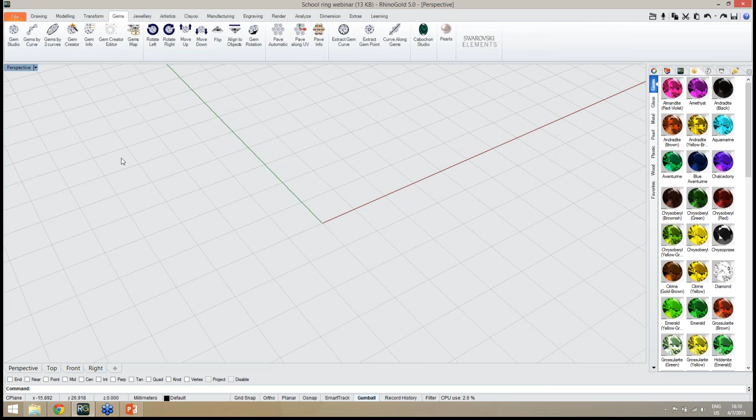So the first step, as always, I recommend to start with either a ring size or a central gem. In this case, I'm going to start with the central gem. So let's go to Gems tab, and then with the Gem Studio tool, we can define the main gem. In this case, we will use Cushion Gem Cut. As you can see under Gem Studio, we can easily select the gem cut we want to use.

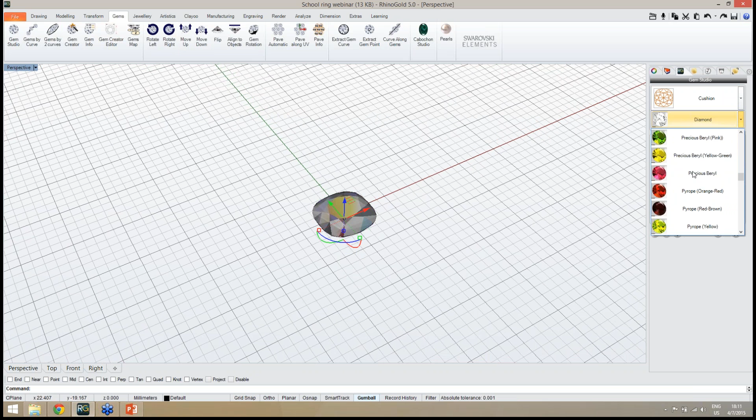And then, of course, we must select the gem, so Cushion. And then we just need to define the size. Let's do it with 6 millimeters. And then the material, of course, in this case, well, I can change for any other material. Let's use Ruby and click OK to add the gem to the document.

So the first step, the gem, is done. Now the next step, I'm going to define the ring size and the ring parameters. So I'm going to use under the Jewellery tab the Signet ring tool. The idea is to define with the Signet ring the shape we want to create, and the ring size, in this case let's use size number 18, and then adjust all the parameters.

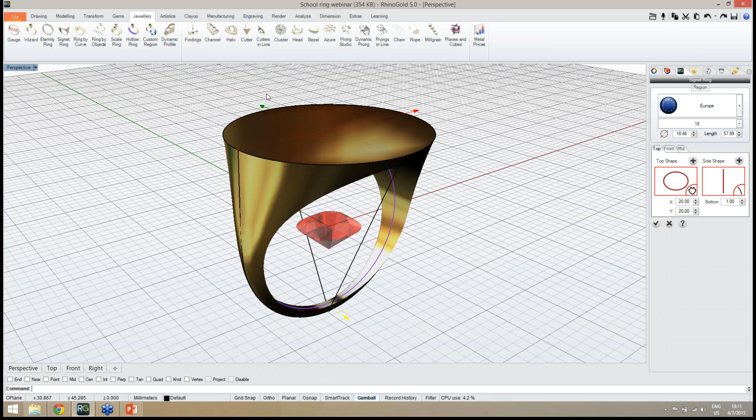So instead of using a round shape in the top, I want to use a shape like the Cushion Gem Cut. What I'm going to do is get under the Gems tab to use the Extract Gem Curve. This tool will allow me to extract the profile curve from this gem. Now I want to use this curve as my top shape for the Signet ring. So I just click Add, and I will define the name. I can define Cushion Curve.

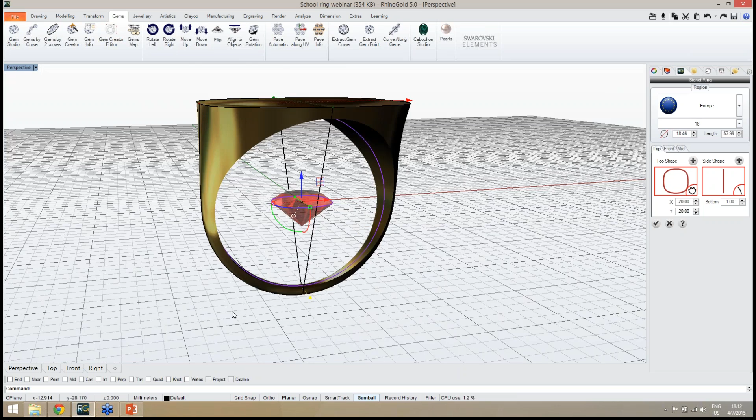And as you can see, automatically it will adapt the ring size, so in this case the ring top shape, to the curve we defined.

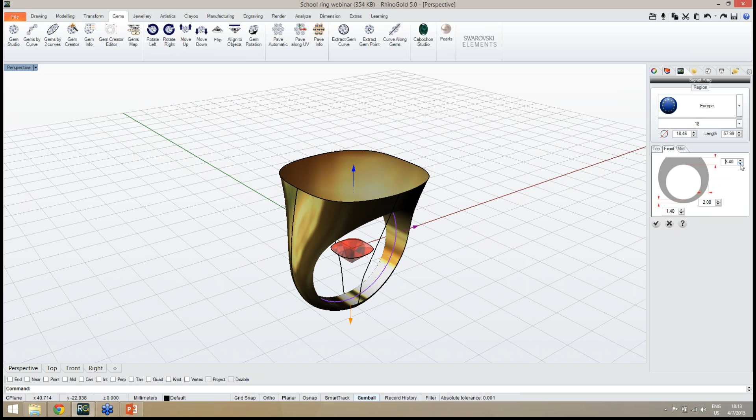So the next step now is to define all the parameters. I'm going to define the bottom with 8 millimeters. I'm going to define the front total with 4 millimeters, using the parameters in the side panel. I can also define the side with 2 millimeters. And of course the bottom, let's use 1.4, looks good. In the top maybe a little bit less, 3 millimeters, I believe it's enough, 3.2.

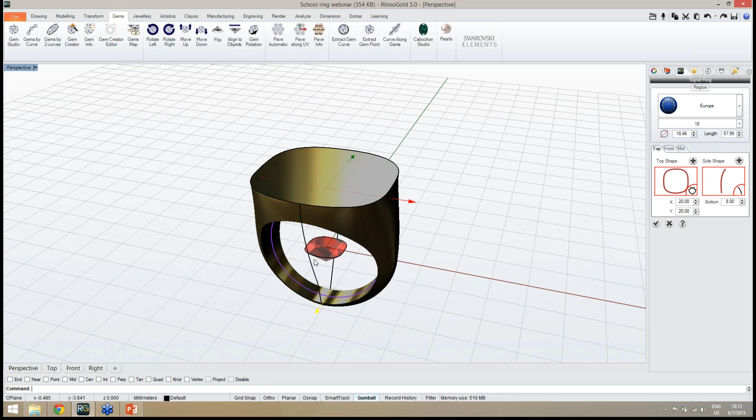And of course in the top view we have the option to define the side shape. So instead of the straight line, I'm going to use profile number 5, and as you can see it will adjust the size, the ring shape with this side curve. So this is the idea. We have the ring defined. I just need to click OK to add the ring to the document.

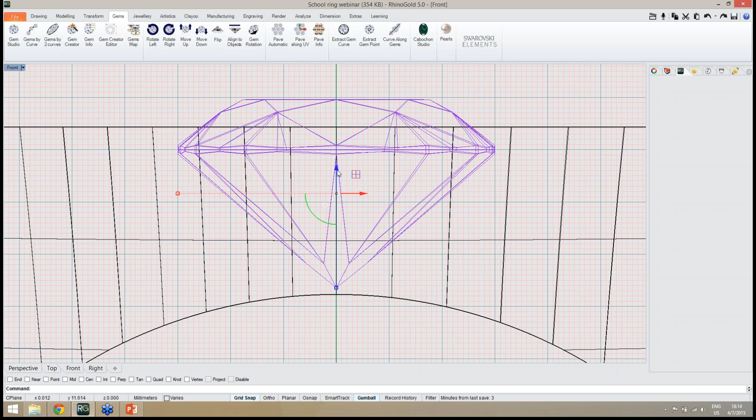This will be the base I'm going to use to define my ring, and now the next step, I'm going to move the gem to the top of the ring. So I select the gem and the curve, and in the front view, using the gumball, in this case I'm going to use the grid snap option. I just use the gumball to move the gem exactly where I need, so I will define exactly in here. And now back to the perspective.

What I'm going to do is first remove the top surface. So this flat surface in the top, I will change it for a different shape. Under the modelling tab, under the cap submenu, we have the extract surface tool. We select this tool, extract surface. We need to select the surface to extract and make sure you are using copy no, so I don't want to copy, I really want to extract this one. I select the surface, press enter, and now I can delete directly with the keyboard to delete my surface.

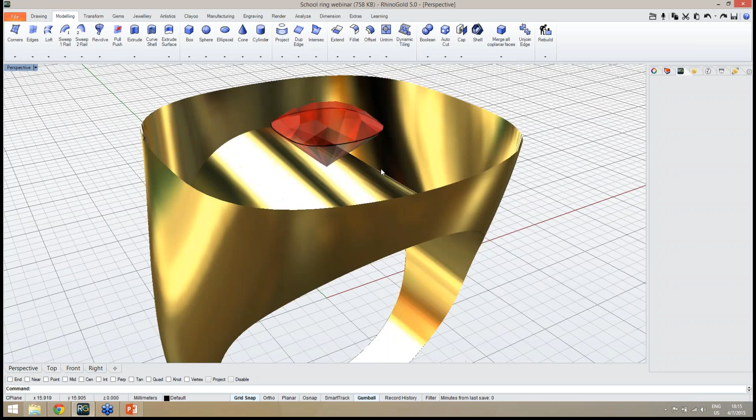As you can see, now my ring surface is open. What I need now is to create another surface. But before, in the top view, I'm going to select this curve, and I'm going to create a curve between these two. The idea is using the transform tool, under the transform tab, I'm going to use scale 2D, so scale two directions, and make sure in the command line we are using the copy option yes.

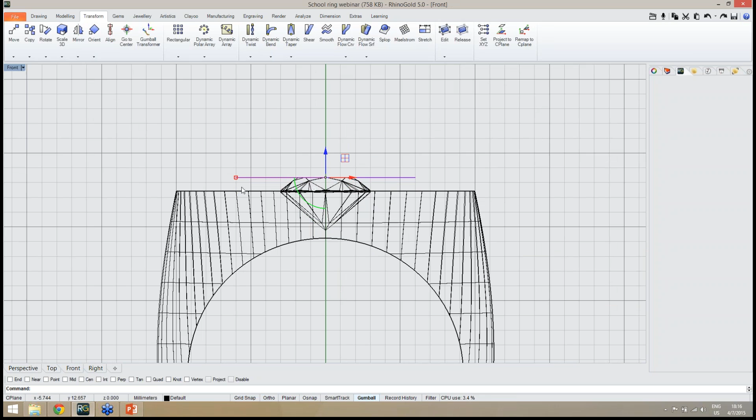So I start from the center and create a curve in, probably without grid snap, just in the middle, so it will be here. Looks good. Enter. So now in the perspective we have another curve, and I'm going to move this curve. Let's go to the front view. I'm going to move this curve to the same height as the top gem surface. So now the idea I can see in the perspective, if I need to scale a little bit, I can scale easily with the gumball, just a small detail.

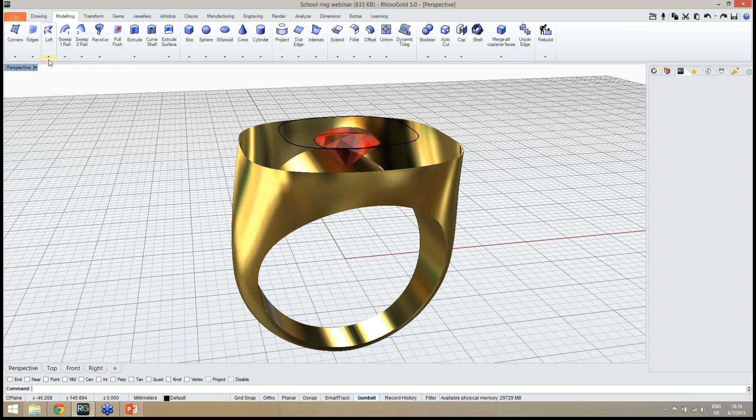And now I want to create a surface using this curve. The idea is under the modeling tab with the loft surface tool, I select the curves to loft. The first one is the edge, the second one is this curve, and the third one is the curve around the gem. So I select these three curves, press enter, and as you can see I have here the direction of the curves and the starting point. So I press enter again, and I have this surface.

Remember, by default it can be normal, so it will be a round surface, but we can easily define straight sections and preview. So this is the shape I'm looking for. After this I click OK to add this surface, and the next step, I'm going to hide the gem to show what I'm going to do.

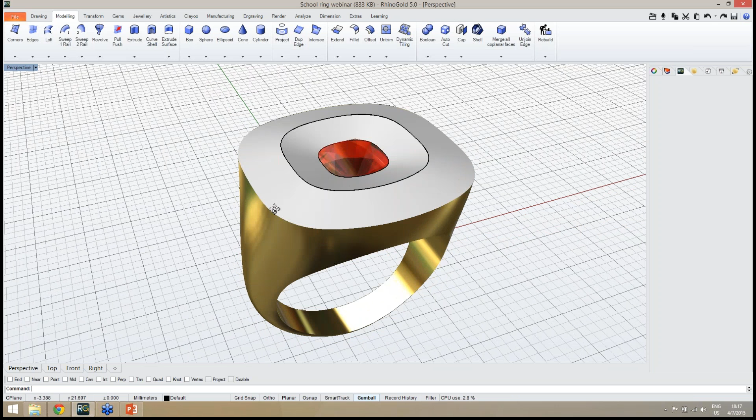Select the gem, hide - remember here press shift to show this viewport toolbar. And now I want to use this curve to create a planar surface. So under the edge submenu we have planar surface, and with the curve selected I create my surface.

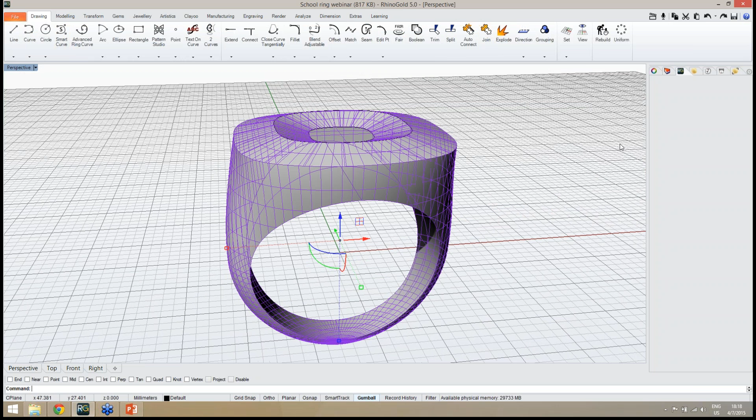So what I need now is to join all this surface in a single closed solid. I select this one, this one, this one, and under the drawing tab with the join tool, join all these in a closed polysurface. As you can see in the side panel, we have this as a closed solid.

So the next step, I will start defining in the right view the model, in this case the curves I want to use in this side part of the ring. So let's use the Smart Curve tool under the Drawing tab, and I'm going to use the option Symmetry Vertical. I activate this option in the command line, and also I will say Closed Curve.

So now I can define easily the curve I want to use. So this will be the idea, the shape of the curve - let me select the curve. As you can see, it's here. I can scale a little bit or adjust if I want, maybe in this direction, and it looks good already.

So I have this curve, and now I want also to put some letters inside this curve. The workflow will be: I'm defining this curve in the C-plane, and then I will project it to the surface. So the idea is, in the right view, to define everything I will need.

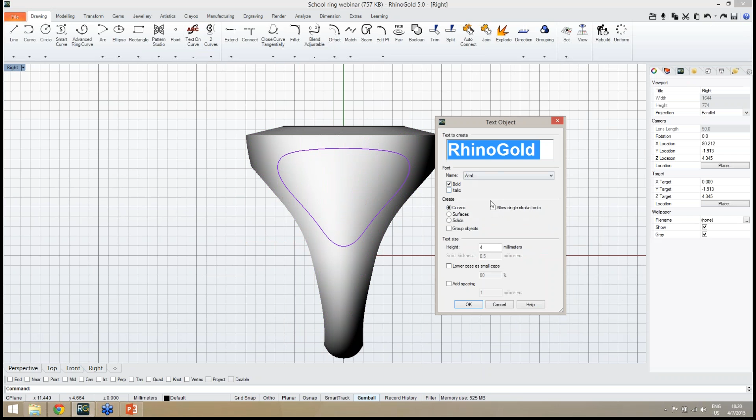So now I will use text, and I will define first a test - RhinoGold - and let me just adjust, let me undo the size. So what I'm going to do is repeat this step: RhinoGold, and the size I will use, let's try 1.8.

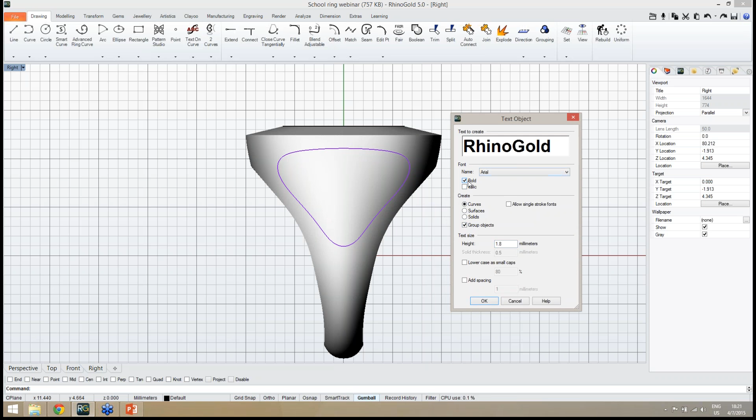Also make sure in these text options we can generate curves, we can generate surfaces, solids. So I'm going to group them, and I will use Arial Bold and 1.8 millimeters. So when I click OK, I can define my text curves here.

Okay, and now the next one, I'm going to define another text - 'university'. Of course, you can customize this exactly as you need. This is just a sample of the workflow we recommend. You can use your own letters - this is just to make sure it's possible to do anything.

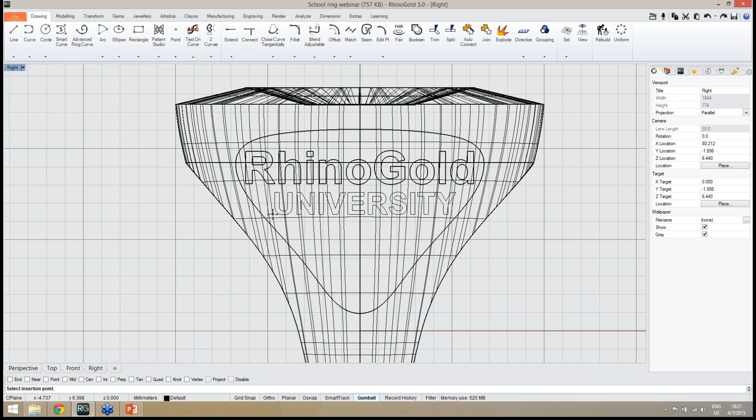So I'm going to place the letters under RhinoGold. Remember, any question, use the chat. And finally, the last one, the text, I will define '3D'. Maybe 3 millimeters - let's try, looks good. So I will place this in this part.

Okay, perfect. So I have the side curves I want to use. These are the curves, and now I just need to project these curves to this surface.

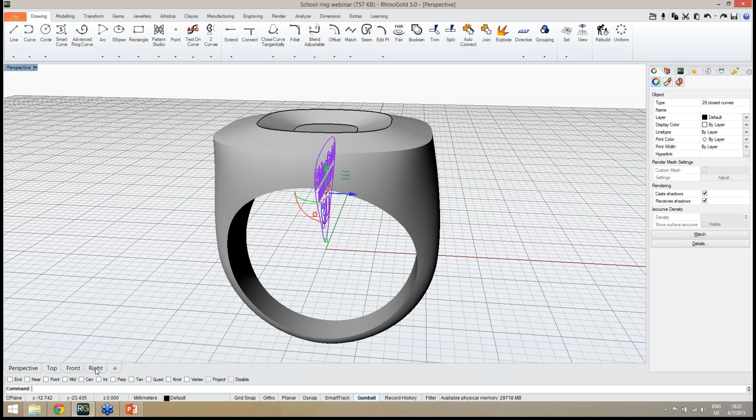So what I'm going to do is make sure I'm in the right view, and now under the modeling tab we have the project tool. We just click, select the curves, and then the surface to project - in this case this outside surface. I press enter, and now let's take a look at the results.

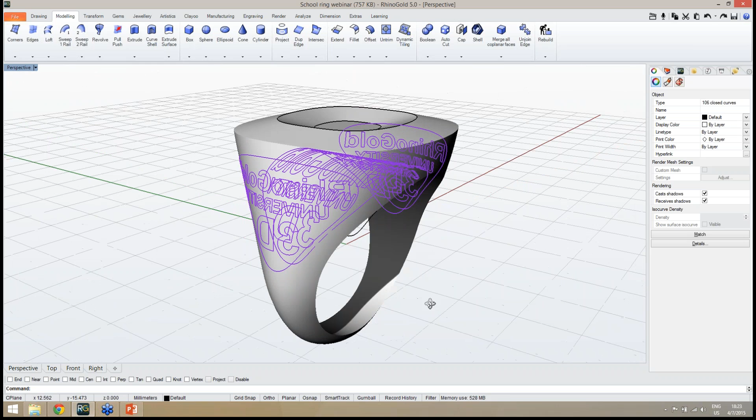It will project all the curves to the entire object, as you can see also on this inside surface. So now what I'm going to do is deselect the ones I want to keep, and then delete the ones I don't want. On this side I can't use it - it's the wrong direction, so I will only keep this side.

So Control to deselect these curves. Remember, we can use Control but dragging a window is faster. And now I deselect the ones I want to keep. So from this side everything is done, and now with delete from the keyboard I can delete the others I don't need. And I'm going to group these ones and change them to a different layer.

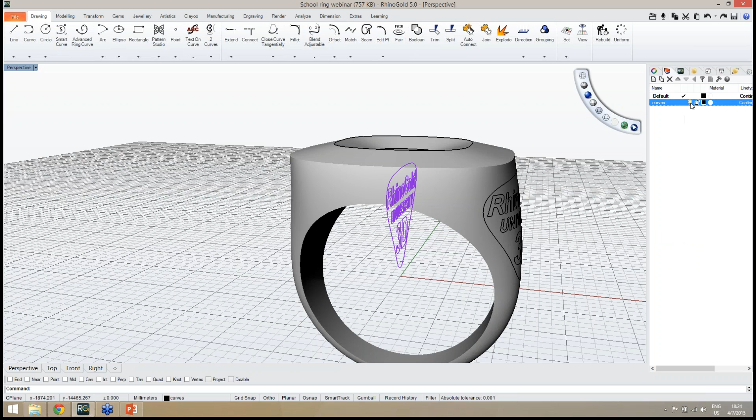So I will call this layer curves, and I will change object layer. Right click and choose the option change object layer. Then I just need to turn off this option for this layer, and it will be hidden. So now I have these curves. Let me group them to make selection easier.

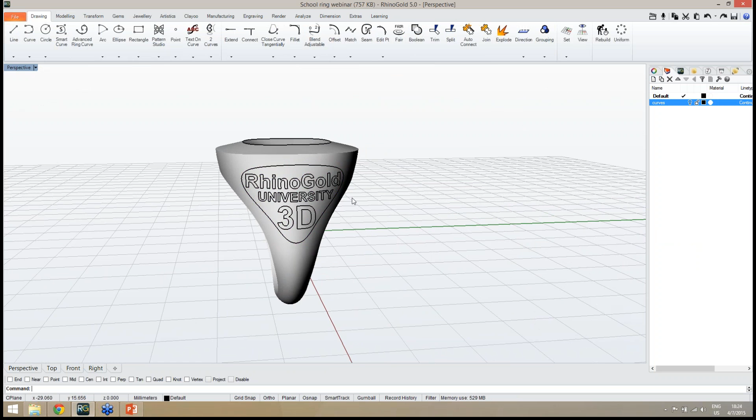I group these curves, and the next step I'm going to create, in this case, I'll explain the process first so you understand the next step. I'm going to create a surface from all these curves, then generate a solid from this surface and make the Boolean operation. To make sure I'm using exactly the same surface, I'm going to the Modeling tab.

Once again I'm going to use the tool Extract Surface, under the Cap submenu. I'll define the option under the command line, Copy Yes. I want to keep the ring exactly as it is, a closed solid, but I want to copy this outside surface. So I copy it, enter, and now I can select the ring and hide it. So I just have my curves and my surface.

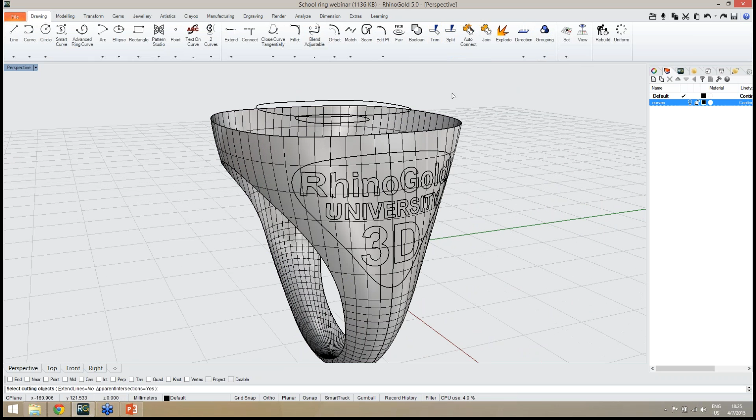Now the idea is to cut this surface using these curves. Under the Drawing tab with the Trim tool, I first need to select the cutting object, which will be all these curves except the surface. Then I press enter and define the objects to trim. I'll start with the outside surface, and then cut this part, this part, each letter. Just click inside the part you want to cut, and as you can see, now I've cut my letters.

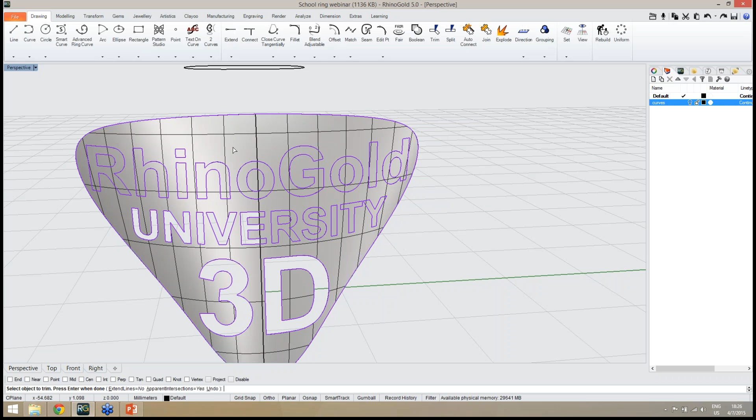This is important. As you can see here, this was the seam of the surface, meaning the beginning and end of the surface. When we trim it, now we have two different surfaces. That's why we need to pay attention to make sure we cut all the parts. So the same, I cut all the parts, all the letters. I just click inside - as you can see, it's very easy.

And after this, let's just finish almost the H and the R. As you can see here, I need also to cut this part. So this is the idea. Everything looks good. I press enter in the end, and now I have my surface.

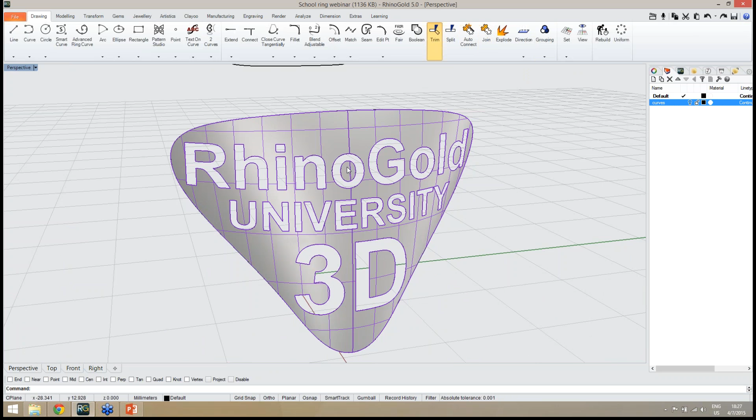I'm going to select all of them. As you can see, the inside parts from the letters are now a different surface. I need to select all. First I will join, then I will group. Join to make sure this part is joined with this and this, but group so each time I need to select, I just select this without needing to select the inside of the O or the D. This is just to make selection easier.

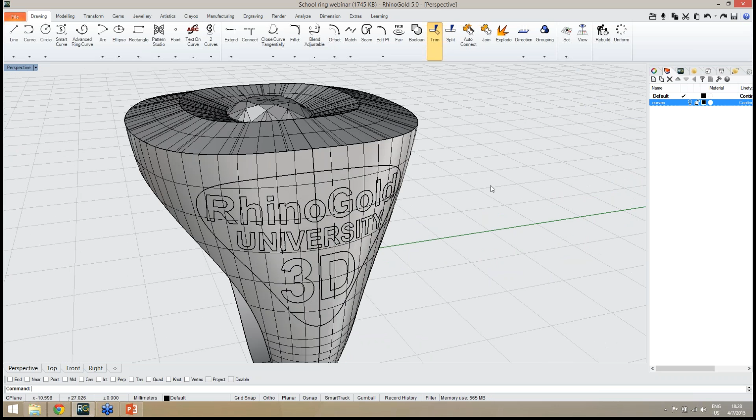So now the next step, I'm going to show my ring again. I'm going to select the curves, in this case only these ones, and change object layer. Now I have this surface, and to create a solid from it while keeping exactly the same orientation and reference, I'm going to the Modeling tab and use the Offset Surface tool. As you can see, the direction is flipped.

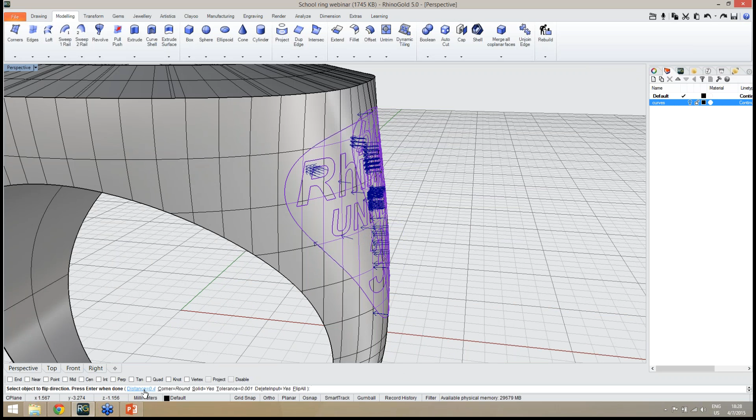I want the inside direction since I want to create a cutting object. So I will flip all, and make sure this is what I need. I want to create an offset distance of 0.4 millimeters and make sure I'm creating a solid - solid yes - and press enter. So now it's generating my solid.

As you can see, I will hide this to show you - I'll hide the ring. I've created this as a solid, so it will be my cutting object. This is the idea - I have my cutting object.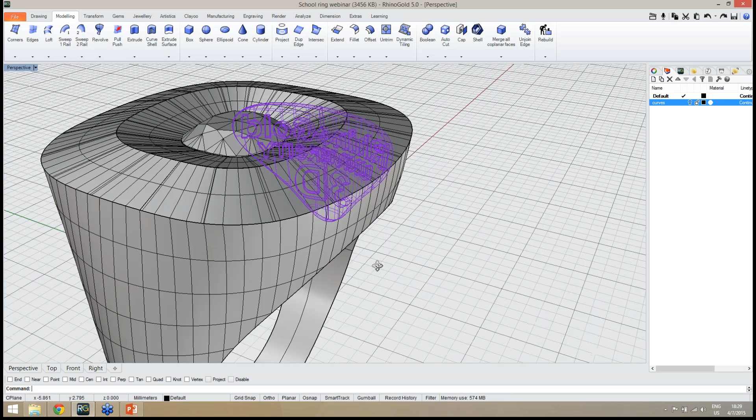What I'm going to do now is create the same object on the other side, but the workflow is the same. In case you want to apply different objects on both parts of the ring, it's exactly the same process. In this case, I'm just going to create the same thing. Just one thing - if I create a mirror or symmetry, it will reverse the direction of the letters, so with letters, it's not recommendable to do it.

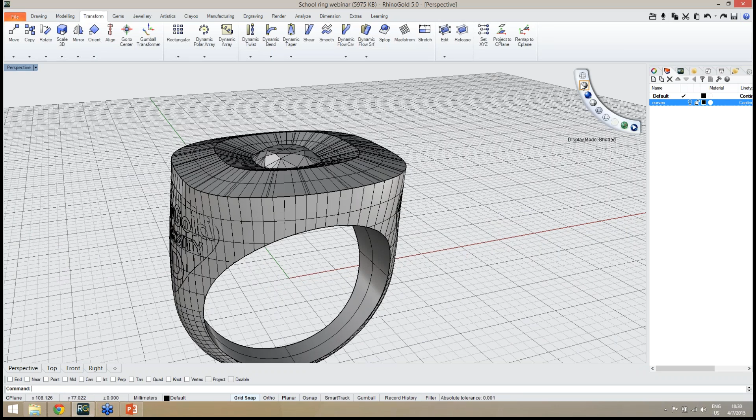What I'm going to use instead is the rotate tool. So the object to rotate is my cutting object. I'll say copy yes in the command line, and then start rotating from the center - grid snap on. I start rotating from here to here. Remember, copy option yes, and press enter. So now we have the cutting object on both sides, and now I want to switch to render view.

I want to hollow my ring. This is a solid ring, and I need to hollow it. So, Jewellery tab, the hollow ring tool. I just need to select the surface to remove, which will be the inside surface, then press enter.

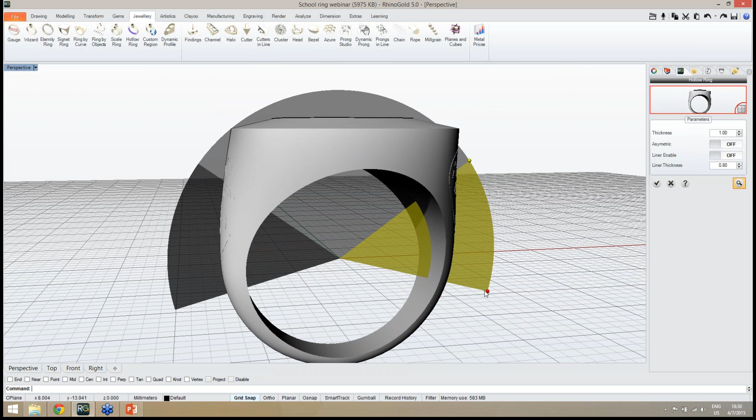Now I just need to define all the parameters. In this case, I want to define this main central area as the area to hollow, then the transition area, and finally the solid part.

In the side panel, we can define the thickness. In this case, I want to use 1.2 millimeters, and I preview the results. So now we have 1.2 millimeters thickness, the ring is hollow, and I just check in here to add the changes.

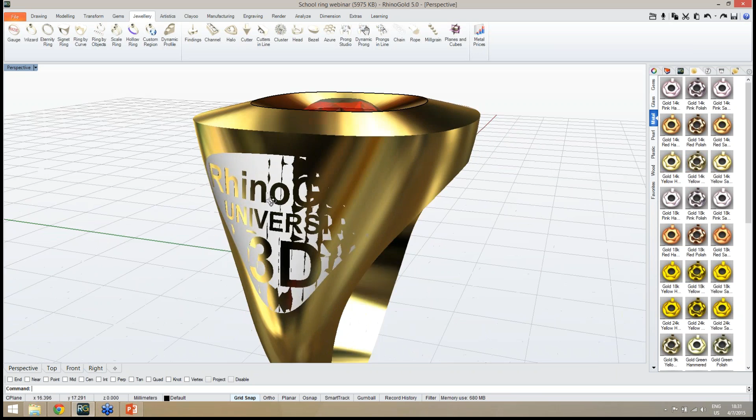Let me define a material just to show. Now, as you can see, we have this cutting object sharing the same surface. Usually we call these coplanar surfaces, and as most of you probably know, Rhino has some difficulty with coplanar faces.

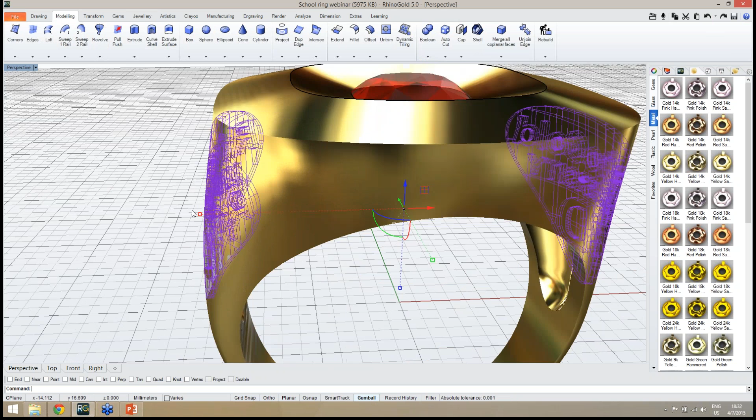So to make Boolean operations, we should avoid this. To avoid it, we can use, for instance, under the Modelling tab, the shake objects tool, or in this case, what I'm going to do is just enable the gumball, and using the gumball, I will scale a little bit. In this case, with grid snap activated, it's not good, so I will undo and disable the grid snap. And now I will scale just a little bit, just to make sure it won't be a coplanar face.

So as you can see, now we have this. As we can see also in here there is a little bit which can be trouble at the time to make the Boolean, so I will avoid it, just scale a little bit more, and I'm sure I will avoid these coplanar surface problems when making the Boolean.

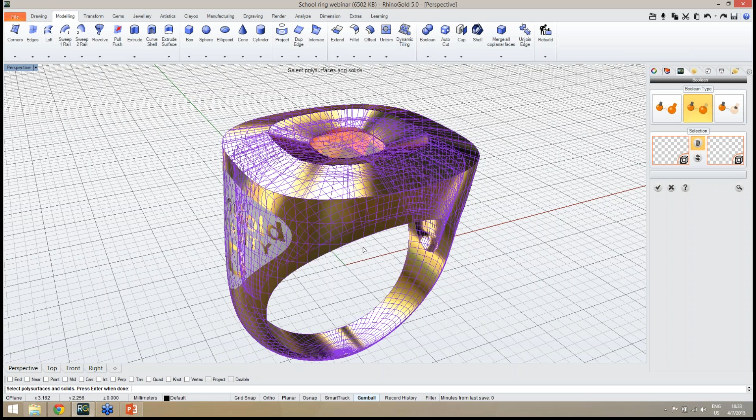So I have my cutting object defined, and now I just need to remove it from the ring. Boolean tool, I define Boolean difference, first object to keep, which is the ring, and second object, the objects to remove, in this case, this cutting object. So I just preview.

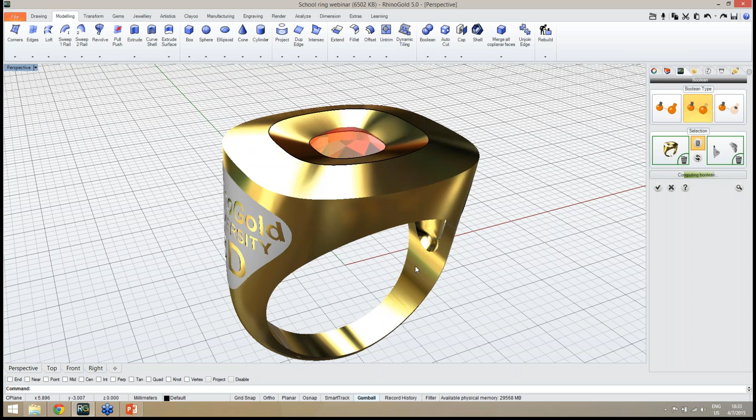Let's take a look. So it's calculating. And as you can see, the Boolean was successfully done. So now I just need to click OK.

And let me change display mode to see better. We have the recessed area. We just keep the letters. So this is the idea. So now I still need to create, this is a closed ring in the top.

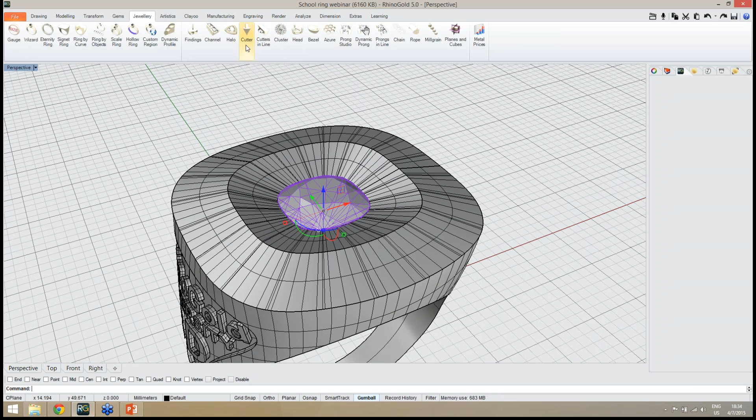I still need to create the stone seat, the hole for the gem. And to do it, I'm going to use the normal cutter tool. So Jewellery tab, Cutter Studio tool, I select the gem, and now as you can see I create my cutting object.

In this one I just want to make sure, because I'm going to create a bezel, so the idea will be to scale a little bit more, because then I will use the bezel to make the stone setting. So I will scale, total scale, or maybe just in here a little bit more. And now I'm sure I'm cutting my ring under the gem.

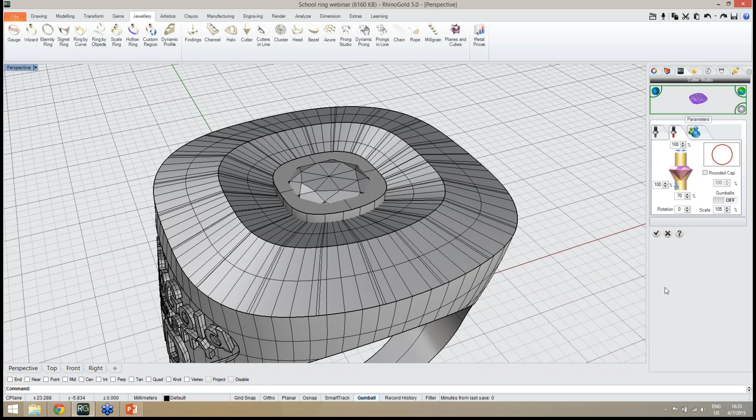So I create my cutting object, and now once again just the modeling tab, Boolean tool, Boolean difference option. I select the object to keep, the ring, and then the object to remove, the cutter. I preview, and as you can see we have successfully removed this part. I just click OK to remove the cutter from the ring.

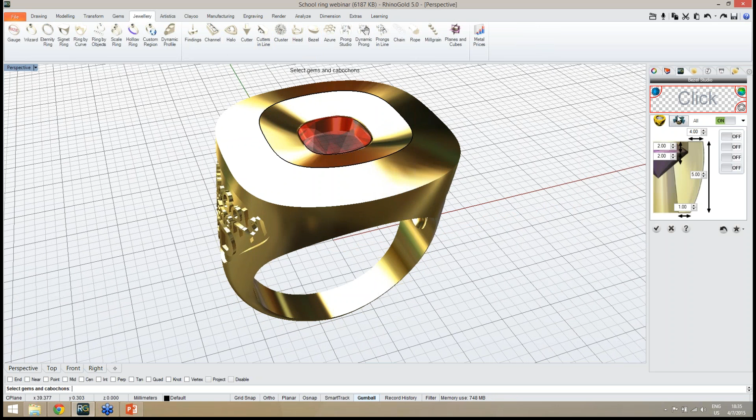So the next step will be to create a bezel for this central gem. So let me change the display mode. Now in this step what I'm going to do is, under the Jewellery tab, with the Bezel Studio tool, I select the gem where I want to apply the bezel. So I select this gem, I press enter, and as you can see I have a default bezel with the default parameters.

I will just adjust the parameters exactly as I need. So in this case I will define 0.5 millimeters in the top thickness, and I will also reduce the width a little bit more, and the same in here, just enough, because in here I don't need too much. As you can see in this ring I don't need so much, so I just define it as I need.

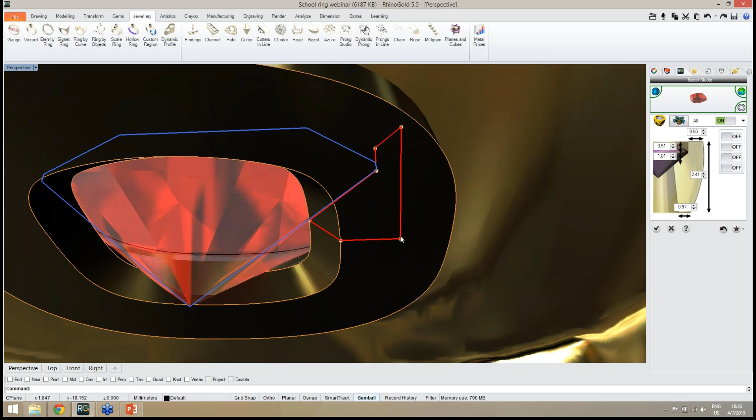I can adjust these point gumballs. Remember, if you use shift from the keyboard it will activate the ortho, and the same in here. So I can adjust easily the shape of the bezel exactly as I need, and probably in here I can reduce a little bit more, and looks good. So I just click OK, and I add my bezel to the document.

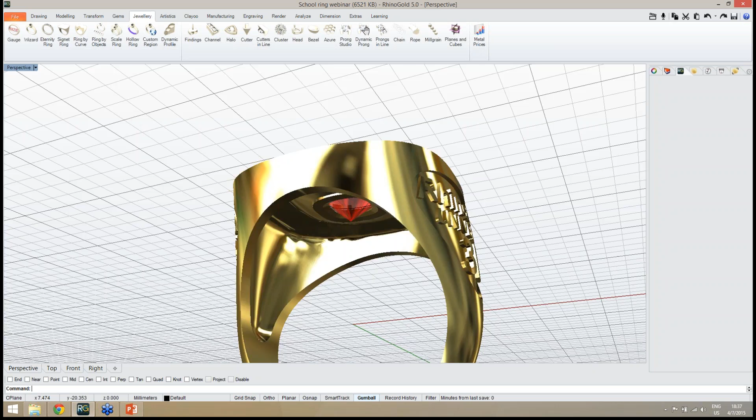So this is the idea. I have my bezel for the central gem. I can hide the gem just to show you how it is inside, ready to make the stone setting.

And now I'm going to create first the milgrain. I can apply now the milgrain to make sure I have space, because I want to make also some letters in this top area of the ring. So what I'm going to use now first is the milgrain tool.

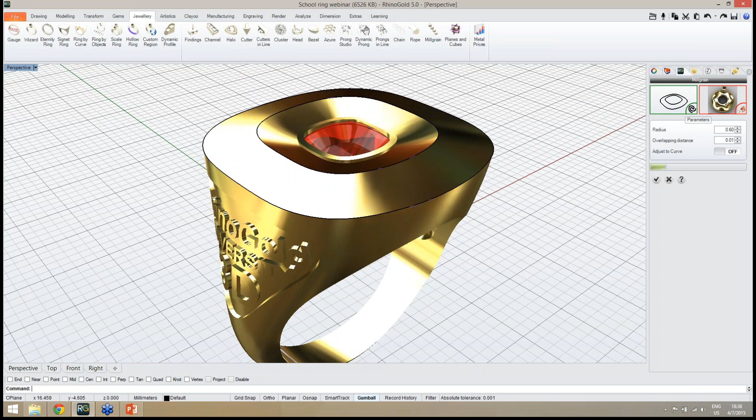So under the Jewellery tab with the milgrain, I need to define the curves I want to apply the milgrain. So the first curve is this one, and actually it can be the curve or the edge, and also this one. So I use these curves, and remember I need to adjust the parameters. So in this case radius from the sphere from the milgrain, and overlapping distance looks good. Just click OK to add the milgrain to the document.

So it's adding the milgrain to the document, as you can see. And now to apply the top curves, let me change the display mode just to see what kind of surface we have in here.

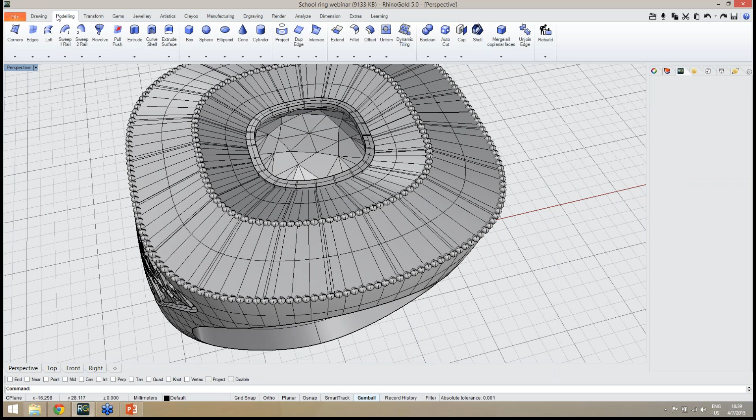So I want to create a curve to make sure I will apply the letters on the curve, the text on the curve. So let's go to the drawing tab, and before that I'm going to the modeling tab just to get the curves from the surface.

So as you probably remember from other webinar sessions, we will use the extract isocurves tool. I need to define, as we can see in the command line, the surface for isocurve extraction. So let's start with this one.

And as you can see, the direction of the curve is not the direction I want to use, so I want to use the other direction. I just need to define the toggle, so the idea is to change the direction. Also, instead of V, we can use U. So this is just changing the direction.

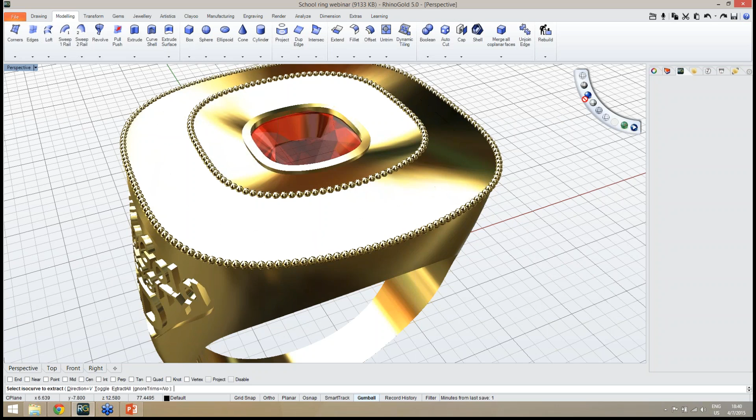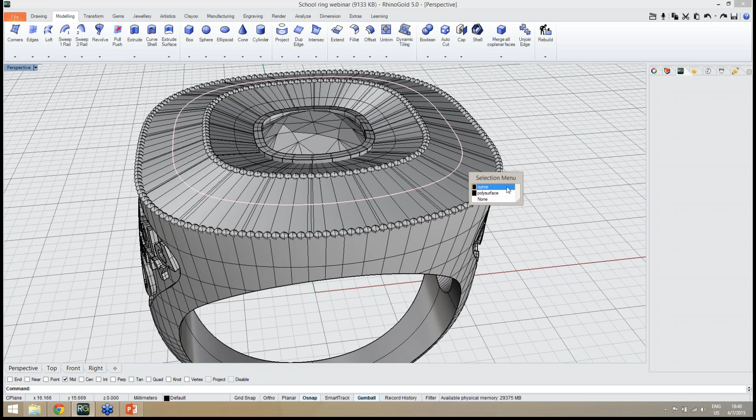And now, to make sure I will use it from the midpoint, I will enable mid in the OSNAP. So in here, as you can see, in the mid, I'm sure I'm using the midpoint. So now we have this curve, and I will do exactly the same for this inside surface.

So once again, what I'm going to do is use the duplicate edge submenu, extract isocurves, define the surface, and now I will use once again the midpoint. So as you can see, I have two curves extracted, and the next step is...

Let me change the display mode. I will place some letters along this curve. So the idea is, drawing tab, text on curve tool.

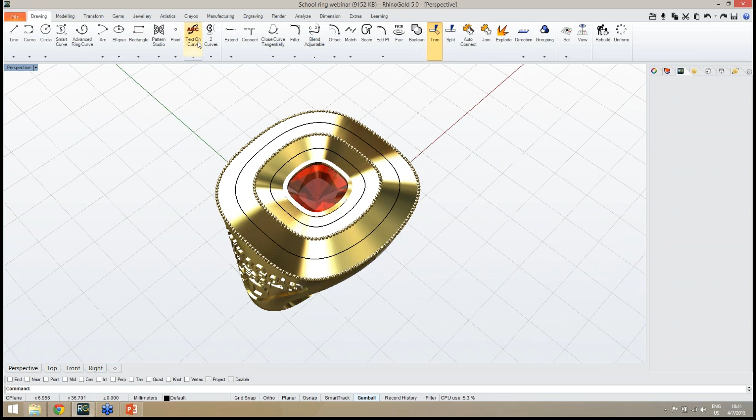And first we need to define the curve. So let's start with this outside curve. We can see here the text—we cannot see it because it's flat, and the surface has a small inclination.

So first, to make sure, I will just define the angle as 15 degrees. So now we can see the letters exactly as we need.

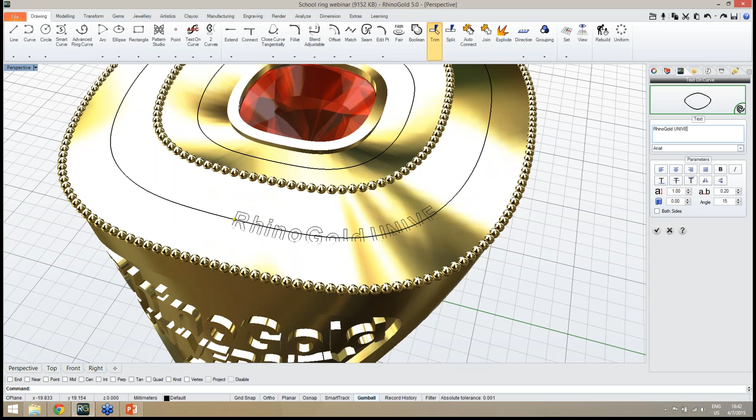So after this, I'm going to define the text I want to use. So I want to use RhinoGold. I can make it bold, so I select and make it bold. Also, RhinoGold University, and now I need to define the text size and all these parameters.

So let's start with this parameter, RhinoGold. As you can see, now the text is adapting to the curve, so it's following the curve.

Let's see, text size, let's use 3.8, 4 millimeters. I believe it's more than enough. Maybe 3.8 is more than enough.

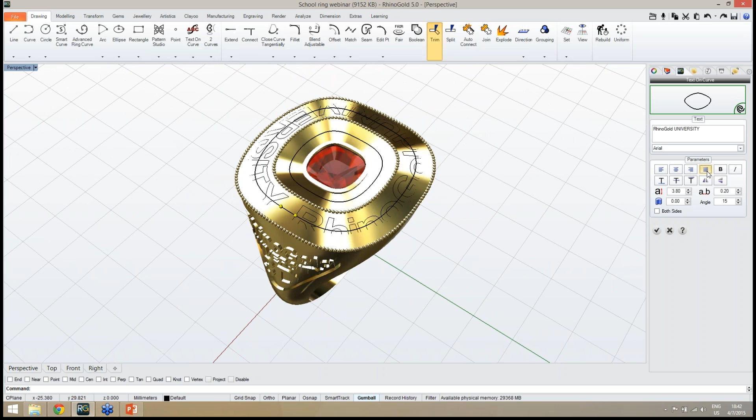And now I will adjust my space and everything. So first, this will be the start point, and this will be the end point from the text. To make sure I'm using it as I want, I'm going to use this justification option. So justify allows us to adapt all the text to divide all the letters along the curve.

So in this case, I also want to use one option, which is... before I'm going to use this, hyphen 2015. Let me just change the keyboard.

Sorry. So, okay, and now I will place hyphen, and hyphen again. So the idea now, I will just need to adjust this distance.

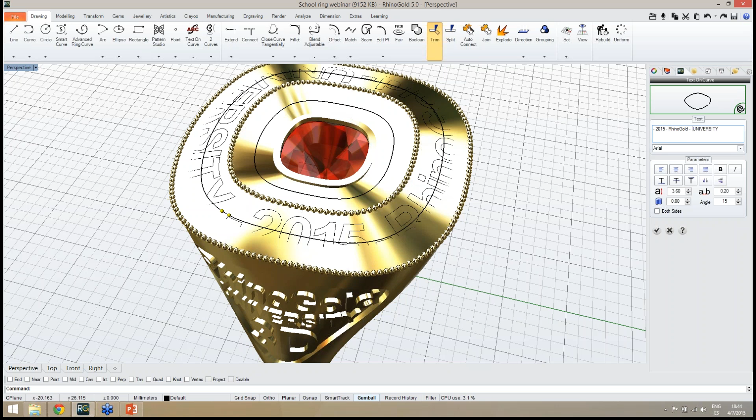Looks good. Maybe reduce a little bit the letters, and also in here hyphen, and maybe one space more, one space more. I still believe we have bigger letters than we need. Okay, I believe now it's better.

I can place it like this. Of course, we can adjust using all the resources we have. Go to the top view to make sure it's exactly as you need.

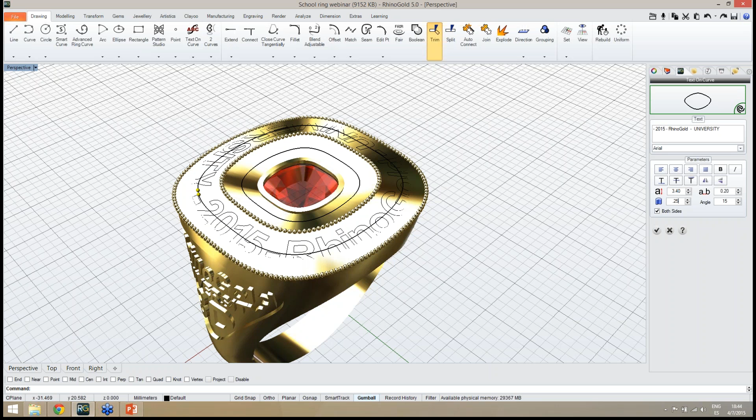So now the next step, I'm going to define—I want to create not only curves but solids to make my letters. So I'm going to use the option both sides, and the extrusion distance I'm going to define as 0.2 millimeters, or 0.25, enter, and remember it will be 0.25 for each side.

So now, as you can see, I have my letters, everything exactly as I defined it. So if I move, it will start calculating again, but this is the result I'm looking for, and I just click OK to add these letters to the document.

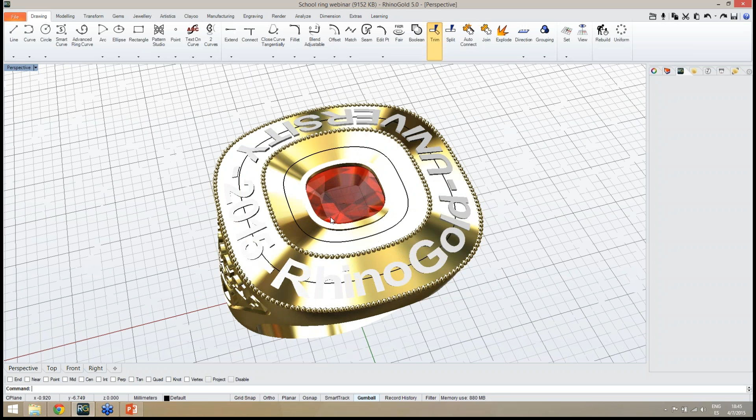So as you can see, this is really easy, and I will follow exactly the same process, the same workflow, to add to the inside curve.

So once again, text on curve. I define the curve as this one. No, in this case, none of these—I zoom in to make sure I select the correct curve. I adjust the angle as we did before.

And now I will define in here exactly the same. So let's use now, for instance, 3D jewelry software.

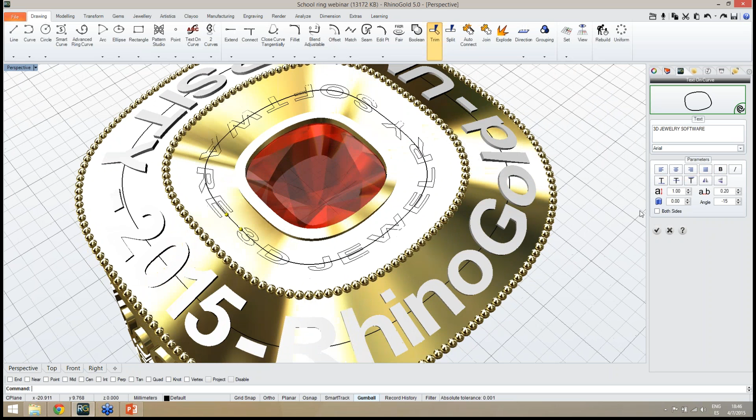Okay, and now I will define bold. I will also define justification along this curve, and start defining the size. So let me use... okay, I believe it's enough like this. I can adjust even better. Something like this looks good. Remember, I can define more space in here between letters, also in here.

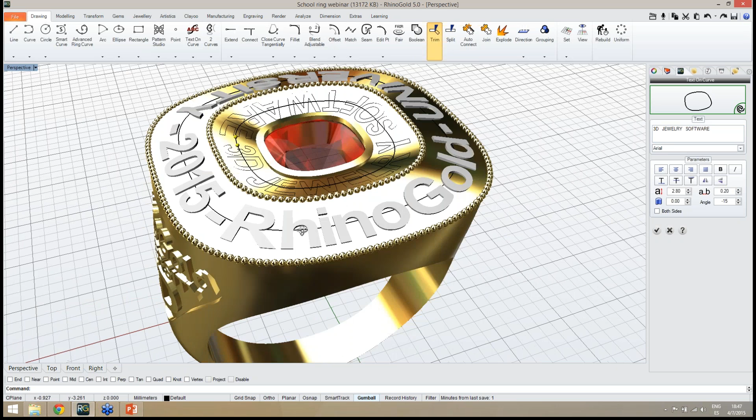And now the last parameter I need to adjust is the extrusion. So now I'm going to define...

Pedro? Yes, let me know, Xavi. What do you think? No, just one question Klaus asked, and okay.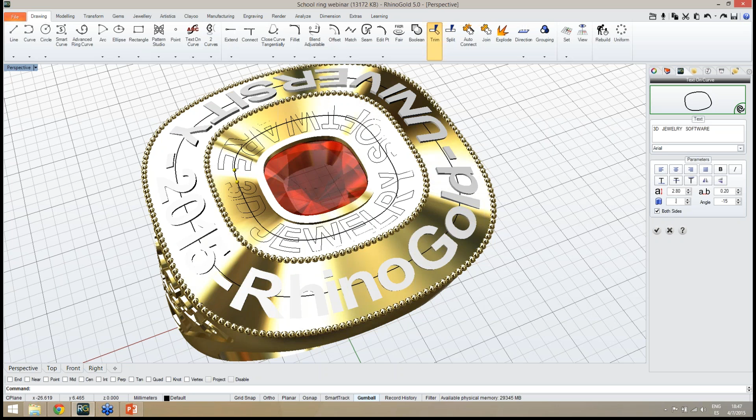It's possible to do it. We just didn't show it here, but he's asking if it's possible to change the space between the letters. And as you can see on the panel, on the right panel, there is this icon AB. Yes, so this is the idea. Using this parameter, we define the distance between letters. So we can define 0.2, 0.3, any distance we want. Just remember, if we apply the distance justify, which means it will divide the text along the curve automatically, so it won't allow us to define the distance. If we don't use this parameter, we can define any distance we want. So remember, this is the parameter we need to define the distance between letters.

Thank you very much, Pedro. You're welcome, sorry to bother you. No problem, no problem. So, muted... unmuted. Let's move on.

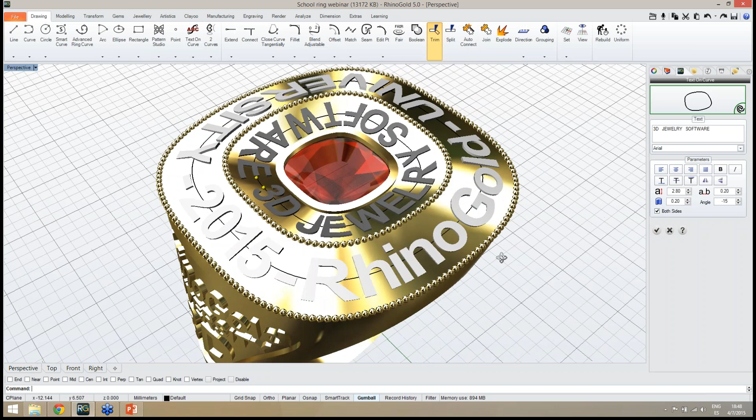And we defined everything. So the text along this curve, click the extrusion option. I define it 0.2 millimeters for both sides. Just one detail: I define both sides just to make sure I avoid coplanar faces.

So I want to make a Boolean union between these letters. And if I make both sides, let's see here, probably we can see it better, maybe with ghosted display mode, we see that we have part of the letter inside of the ring. So this is good to make the Boolean operation. That's why I keep both sides. So remember, it's 0.2 to the top and 0.2 to the bottom direction.

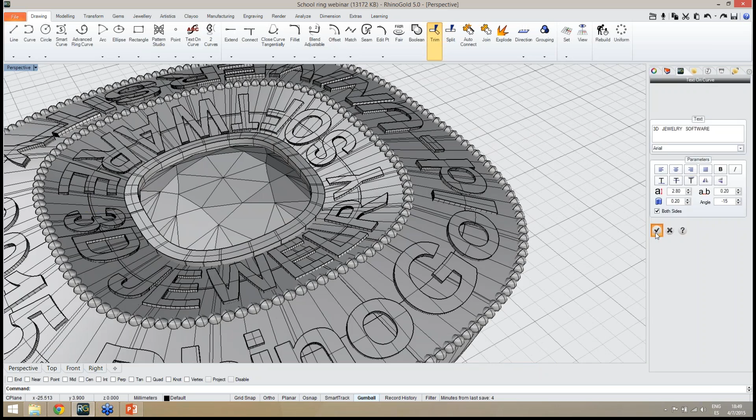So after this, it's done, I just click OK. And as you can see, let me change the display mode. We have the letters applied along these curves. Let me middle mouse button and select curves. So I will select all these curves and change to the layer curves.

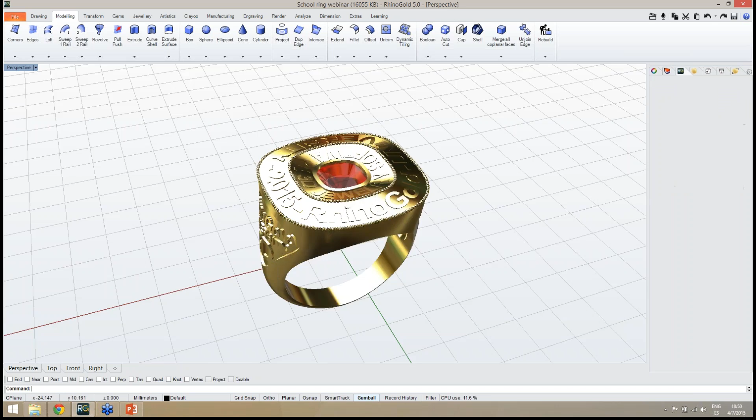So change object layer, and now everything is defined. So what I need to do now is make the Boolean operations. As we have done before, Boolean option, we define Boolean union. In this case, Boolean union, I need to select all the objects I want to make the Boolean operation with. I select the ring and all the letters. I preview, so it's calculating the results. Okay, so as you can see, done. We have made the Boolean, so this is a single part.

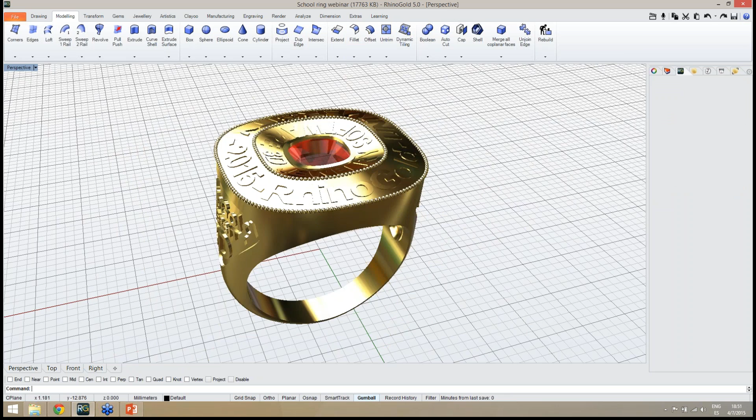Also we can do it with the bezel. Once again, Boolean, preview. So this is the idea. I would say that this is just to show the workflow. Of course, we project in here our own text. It could be anything, it could also be Rhino embossed relief, for instance. We can do anything. So on the side part of the ring, also the same workflow if we want to project something in the side or front view. So this is just to show the workflow, what is possible to do.

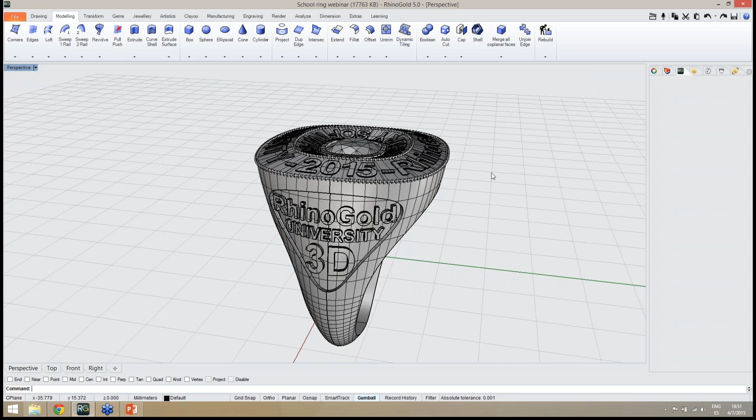And I believe this is a good exercise. Actually, now to make the render, for instance, I will make one detail. So if I want in the render for this bottom surface, this surface in the recessed area, to look a different finish—of course, when we go to printing and casting, this will all be the same object, but to represent different types of finishing process, we can easily, under the modeling tab, extract this surface just for render.

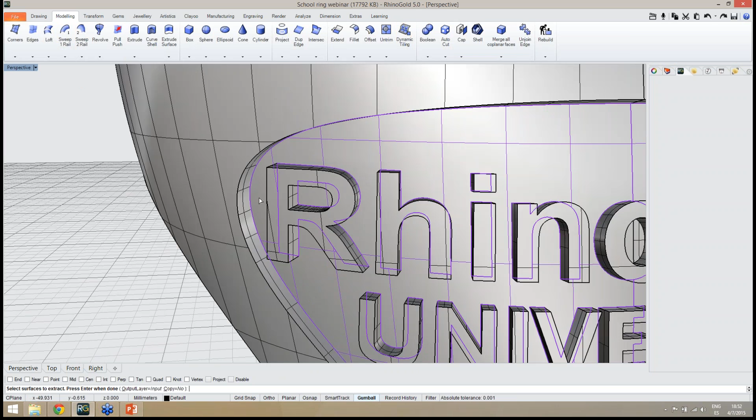So I just extract, copy—I would say no, so I will extract this part, also this part, just to apply a different material and make the render better. So I can apply different materials. So this one, I extract all these surfaces. I will do also in here. I believe I don't miss any.

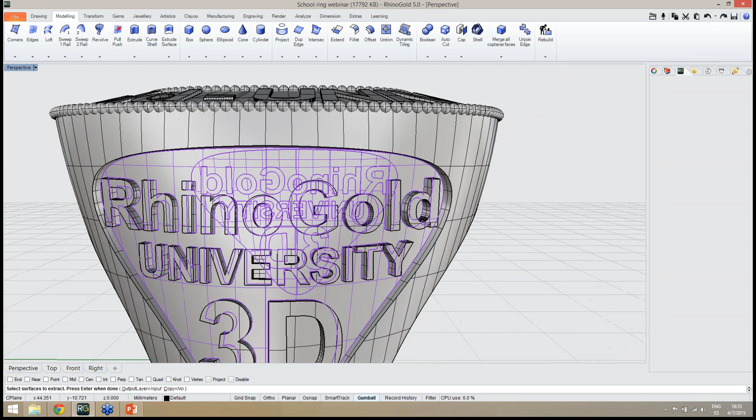I hope not, but in case we can repeat this operation. I will do the same to the other side, so select the surfaces, also this one and this one, and in here the same, and in here the same. So I select all, press enter, and once again I join the ones I can and I group all of them to be easier for the selection.

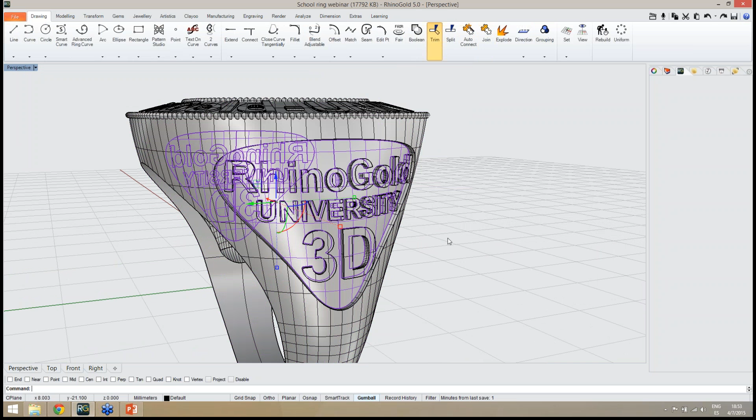So now I can apply. I can select all the objects, and then I will remove from the selection this surface, both, and the gem. So I will apply the material to all this selection.

To make the render, let's go to the Render tab, Render Studio icon, to open the Render Studio in the side panel. Now I'm going to start with the metal, so let's use metal sandblast. I'm going to use yellow gold. Let's change the display mode to render just to make sure the material is the one we defined.

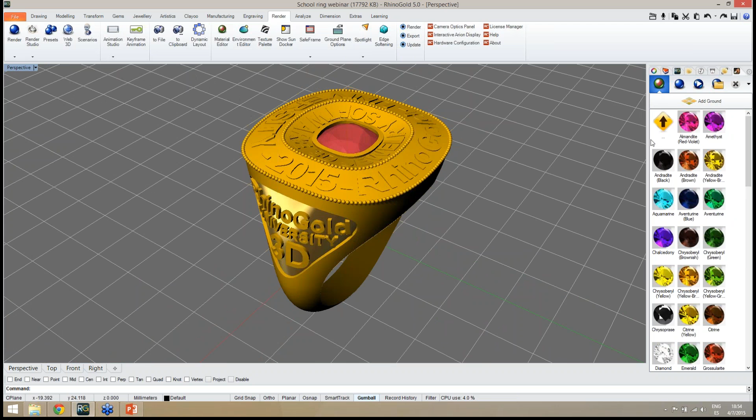The gem I can apply, for instance, let's keep the ruby, so ruby gem. Remember, when we are on the Render Studio side panel, we are applying Arion materials. These materials are good for rendering. We cannot get the weight using this material, this is just for rendering.

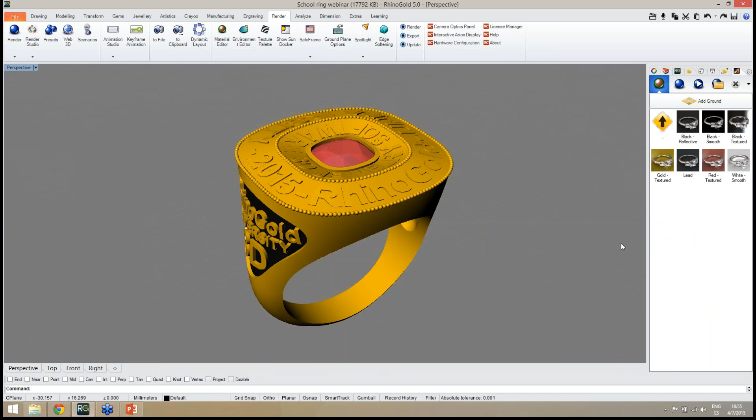And this part, for instance, if I want to make it dark it could be other metal, but let me use black plastic just to show a different option we have for the render. So I apply all the materials exactly as I need. Also remember, I add the ground in here easily, we have the ground folder, and we can easily drag and drop. Let's use the lead material, and now I will define the render.

As always, render resolution, define the position. Looks good, and now I just click on render. Let's see the results.

So it's calculating. As you can see in the beginning, we have the render with too much noise, but it's cleaning. Each pass it's cleaning more and more, and in the end we will have a high quality image. So I apply also this sandblast gold. We could play a little bit with the materials, but it looks good. Let me wait just a little bit more to see the results a little better, but this is the idea.

Remember, use the chat to make all the questions you have. No, Pedro, no, come on. They have been asking a lot. That you know. No, of course not. Keep asking.